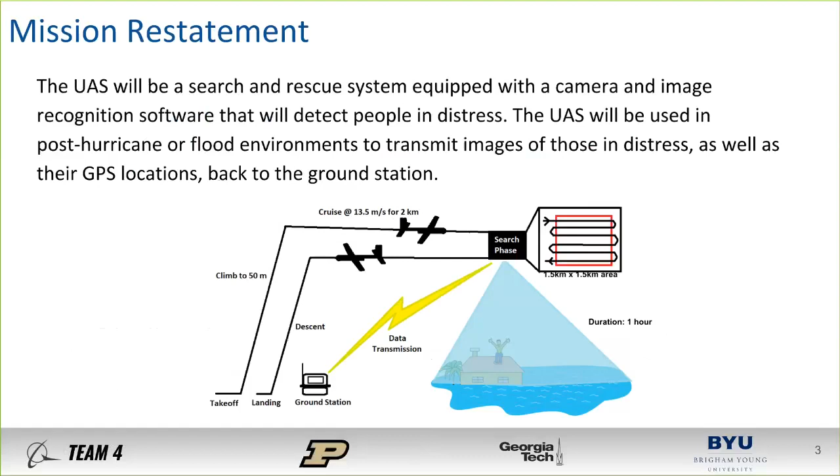So from the MCR, there were a few concerns that we were able to resolve. With stakeholders, we were asked to reach out to individuals who were affected by recent hurricanes, and we're in the process of doing that. We've made phone calls and sent out emails, and are just waiting back for that. We were also asked to make some more definable mission objectives, and so we were able to define a flight endurance of 60 minutes and a range of 50 kilometers.

As for mission altitude, we think that 50 meters is optimal in studying different camera capabilities and being able to resolve people who are in distress. For camera and image processing, Nick Wallace is going to discuss that further into the presentation. And for weight, we were able to reduce the overall weight from 15 pounds down to 12 pounds, so we're pretty pleased with that.

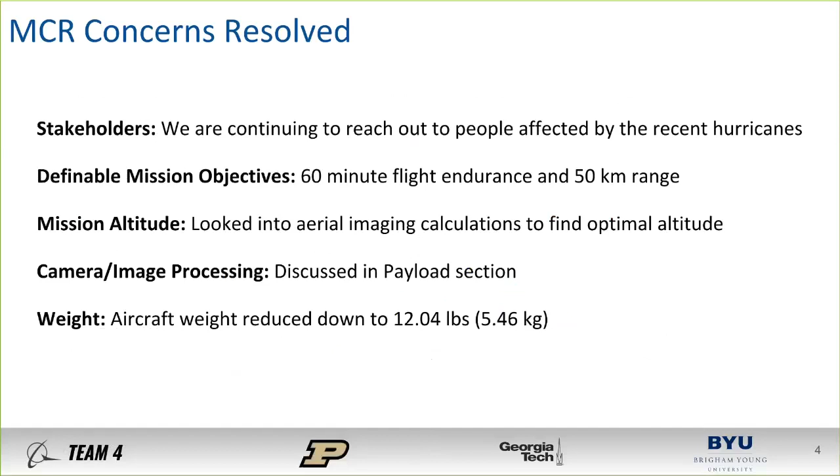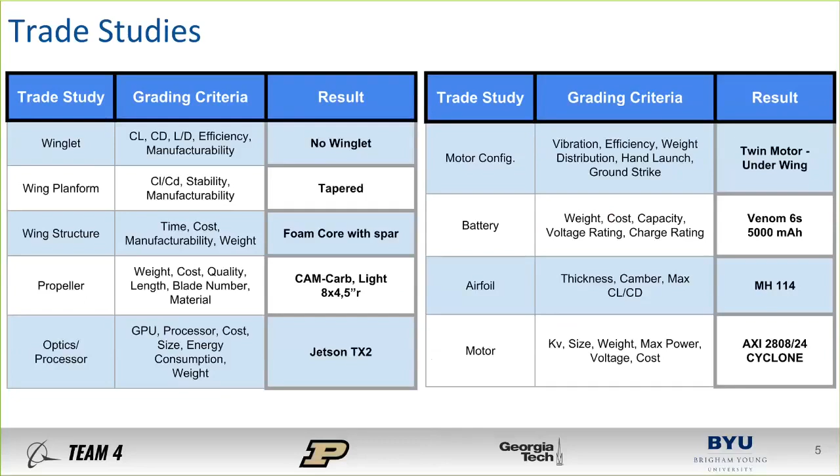Our team was able to come up with several trade studies, and these trade studies were graded based on different criteria. You can see the grading criteria for each trade study listed there. These are our figures of merit, with which we were able to determine a result that we think will be useful in these designs. And several of these trade studies will be expanded upon in the presentation. So I'd now like to turn the time over to Nick Wallace.

Awesome, thanks Josh. So for the next part of our presentation, we're going to be talking about payload specifications. The content in these slides was created by our teammate Andrew Arlarcone, who unfortunately is in a class right now. So I'm going to be presenting instead.

So as previously stated, a big part of our mission is to have our aircraft autonomously recognize people that are stranded. And so we started looking into how to detect people in real time. And we found that the ideal solution is using pre-trained models, which are trained with large pre-labeled data sets to identify multiple objects such as people, cars, or animals.

So these models require libraries for computer vision and machine learning to access videos and to function and operate properly. And all of the pre-trained models that we were looking at can run off of the CPU, but we also found out that they can run with a CPU and a GPU, or graphics processing unit, running in conjunction. This greatly decreased the processing time per frame by almost an order of magnitude.

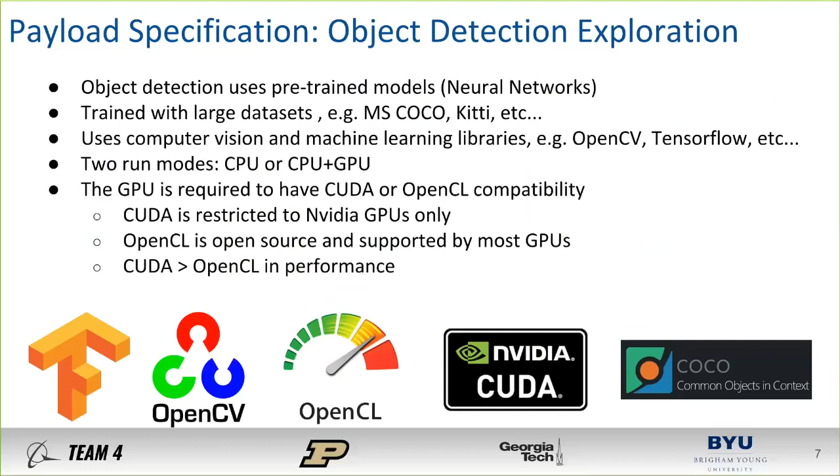And as we were researching, we found that CUDA is far superior in performance and functionality over OpenCL, and it also seems to be the most popular among programmers. And so we decided to look further into CUDA, and really the only downside to using CUDA seemed to be that it only operates and is compatible with NVIDIA GPUs. And so that narrows our selection options for GPUs, which I'll talk about in a future slide.

The RCNN also has two divisions. There's Inception V2 and NAS. So the Inception V2 was a little bit faster. The two divide up the image in different ways, which differs the computational time involved with both of them. And so it seemed like both of them were fairly successful in identifying objects, and the Inception V2 was faster.

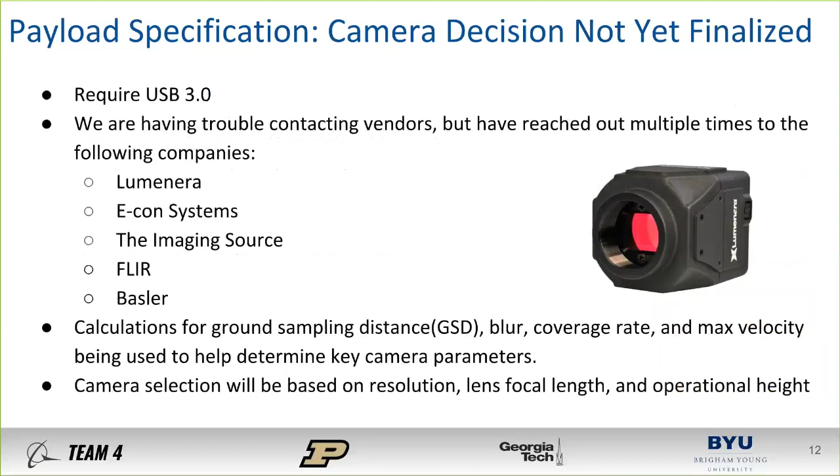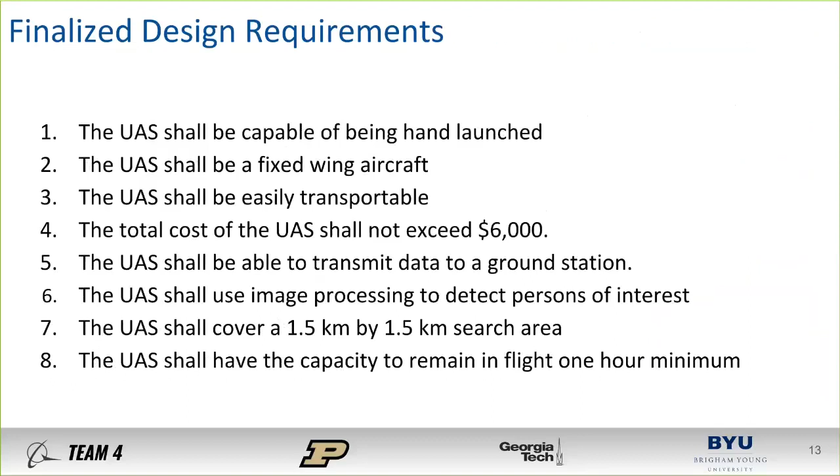This is our finalized design requirements. It's, for the most part, just a continuation of the slide that we presented in the MCR. The only 2 that we added was number 7 and 8 because we felt like we needed more definable objectives. So number 7, our UAS will cover a 1.5 kilometer by 1.5 kilometer search area. And then we want it to be able to remain in flight for a minimum of 1 hour, as Josh specified earlier. And so with that, I'm going to turn over the time to Pratik to talk about our aircraft configuration and aerodynamics.

Hey, thanks, Nick. This is Pratik from Purdue University, and I'll be going over some of our configuration selections for our aircraft. One of the defining changes that we've made from MCR to PDR was in the change of the wing measurements. Originally, we had a very large wing, which we deemed was unnecessary for the speed we wanted to fly at, which is about 15 meters per second. So we downsized the wing a little bit, which helped reduce our weight and also allowed us to carry a heavier payload, which we now know is a CPU plus GPU combo. So that worked well for us.

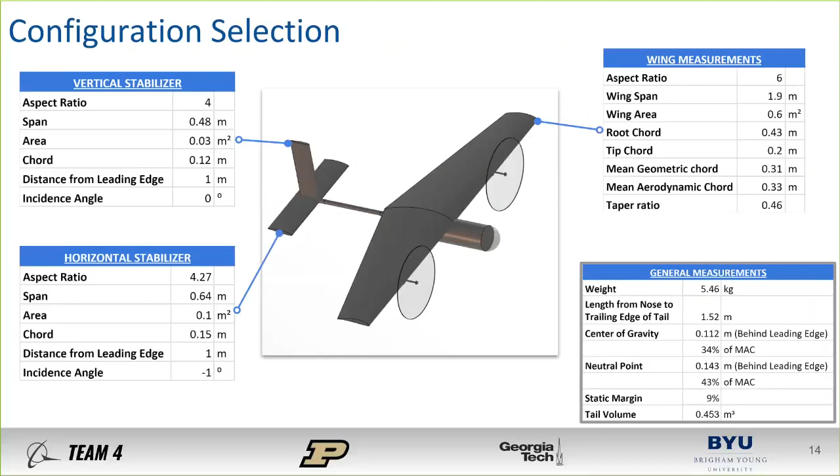So this is where we started with our constraint sizing. Two of our major constraints were that it had to be hand launchable at about 8 meters per second, and the second being we wanted an efficient cruise at about 15 meters per second. The solution we came up with was we wanted a high CL max wing for our hand launch so that our stall speed is much lower than it was initially.

And we also wanted to design our aircraft to fly around a wing loading of about 65 newtons per meter squared. This is behind our maximum that we can hand launch at, which is about 70, so we have a little bit of a buffer either way. For our payload weight, we estimated it to be about 2 kilograms. Our payload isn't currently at 2 kilograms, it's actually less, it's about 1.4. There is some extra leeway to add more components down the line should we need it.

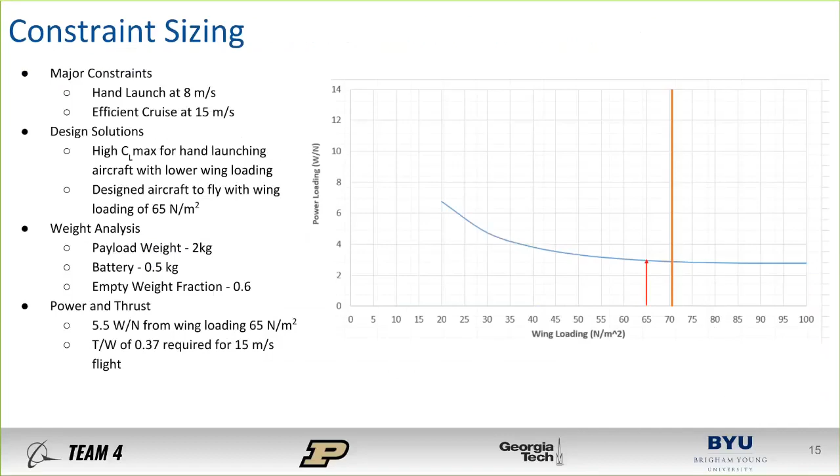And lastly, our empty weight fraction is about 0.6, which allows us to build the airframe to be as sturdy as needed. The power loading that we got from this graph was about 5.5 from the wing loading of 65 newtons per meter squared, which gives us a thrust to weight of about 0.37 for 15 meters per second flight.

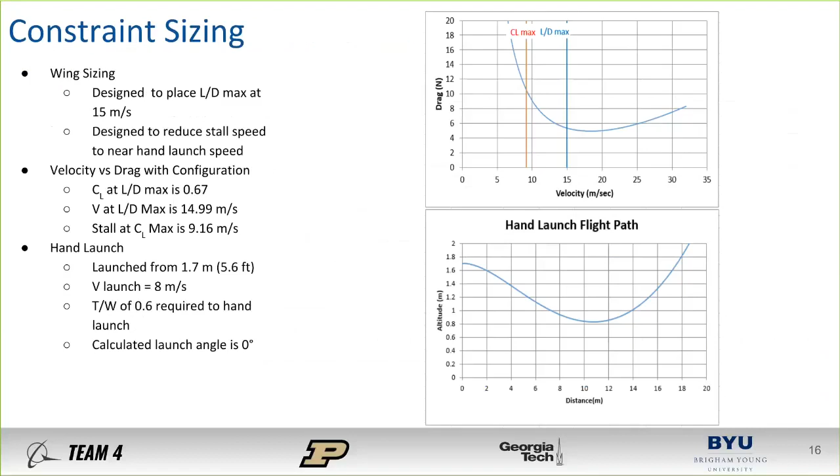Here we have our airfoil selection. When selecting our airfoil, we did a trade study of about 6 different airfoils. Each were compared at around a Reynolds number of 200,000. And we placed a lot of emphasis on our small angle of attack values, so anywhere from -5 to 5 degrees angle of attack. One of the main preferences of our airfoil was we wanted it to have a larger camber so that it would have higher lift at low speeds, again for that hand launch requirement.

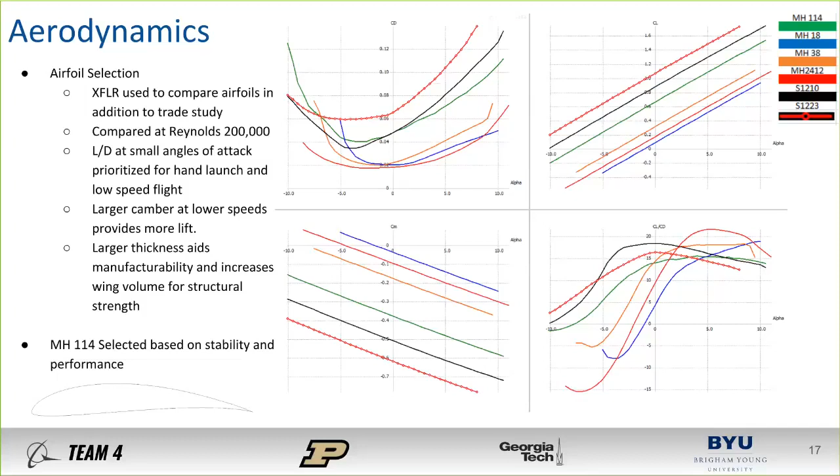For our wing design, we had a couple of different wing design options, and we did a planform trade study. We examined 5 different options. We had the rectangular wing, tapered wing, elliptical wing, pointed tip, and sweep back. Of these 5, the first thing we wanted to look at was how easy or how reliable manufacturing is, so that if we needed to make a replacement, we would be able to do so on constrained time.

The elliptical and pointed tip wings were eliminated because they were deemed too hard to manufacture or took too many resources to manufacture reliably. So the top three wings were the rectangular wing, the tapered wing, and the sweepback wing. These wings were modeled in XFLR5 and compared at a Reynolds of 200,000, just like the airfoils. The dimensions were kept constant between all the wings, and the velocity was modeled at 15 meters per second.

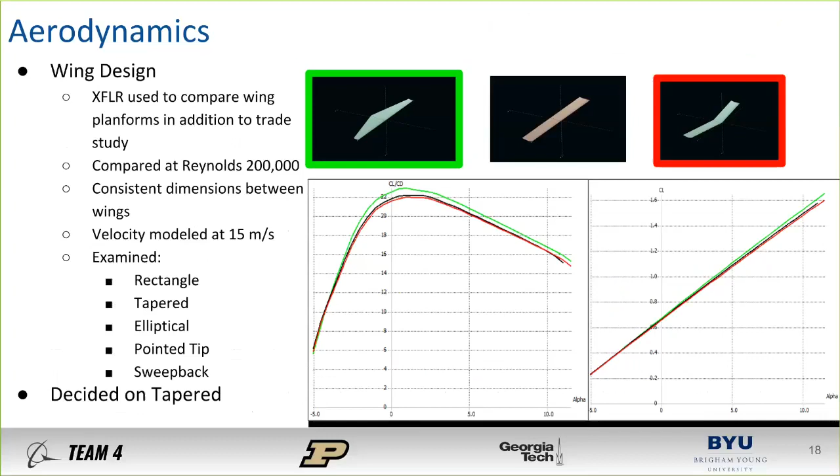For our tail design, we again used XFLR to model and kind of test out the tail design. We started with historical data and proportions to start with the basic tail, and then we used XFLR to calculate our CM versus alpha graph, which is, we wanted to get a positive angle of attack, positive trim angle for our airplane. So by shifting around the size and distance from the wing, we were able to get a trim angle of about 1.2 degrees angle of attack. And of course, the negative slope denotes that it's relatively stable.

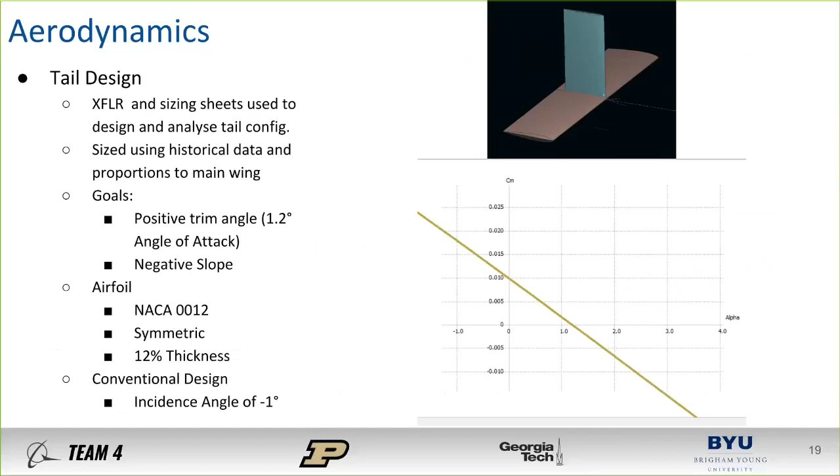For the airfoil itself, we wanted a symmetrical airfoil that won't produce any sort of lift moment. So we got the NACA 0012. With 12% thickness, it's fairly easy to manufacture and easy to implement. We do have an incidence angle of -1 degree on the tail, which helps us balance out our graph a little bit better. Next slide, please.

Lastly, here's our stability analysis of the aircraft. From XFLR, we were able to get the data that our mean aerodynamic chord was about 0.33 meters, and that our neutral point was 0.143 meters, with our tail configurations from the last slide. For the static margin, we wanted to stay between 7% and 10% because flight conditions for our aircraft are very stable, very normal flight conditions. So we wanted an aircraft that wasn't too twitchy or too muddled, so we decided to go the middle ground.

So getting a static margin of 9% required a CG at about 0.112 meters from the leading edge, which is 34% of the mean aerodynamic chord. We're happy with our static margin. However, we want to do AVL analysis in the future to gain a little bit more information about the stability of our aircraft, in addition to what kind of forces we can expect from roll and pitch. Next slide, please.

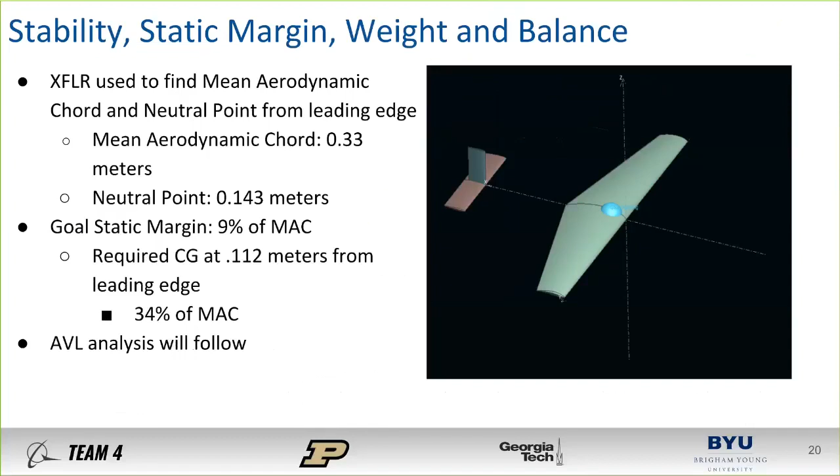This two-level configuration allows us to bring our CG forward and also provides a good space for our propellers because we are doing a belly landing, and propeller strike is definitely an issue that we wanted to focus on avoiding. Next slide, please.

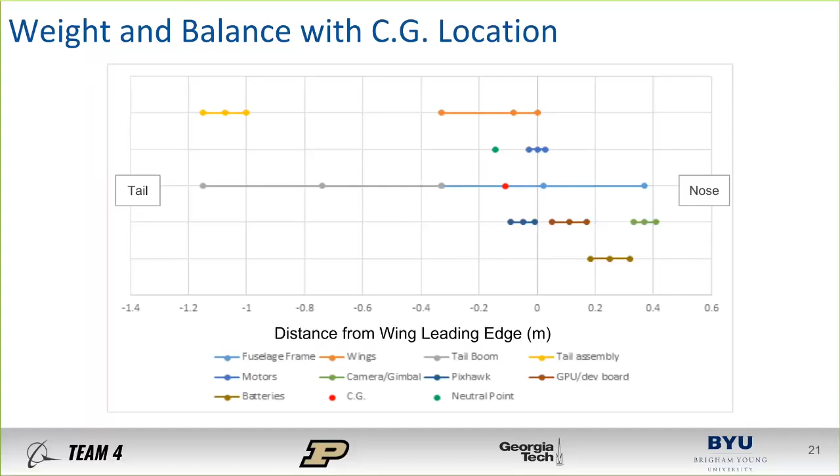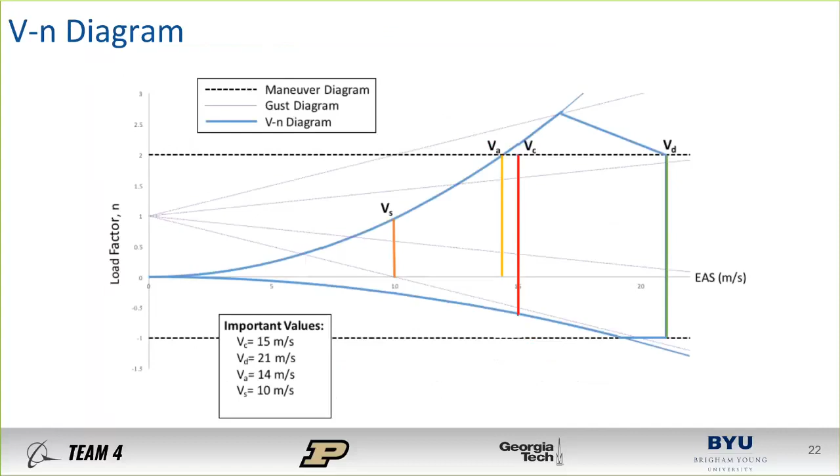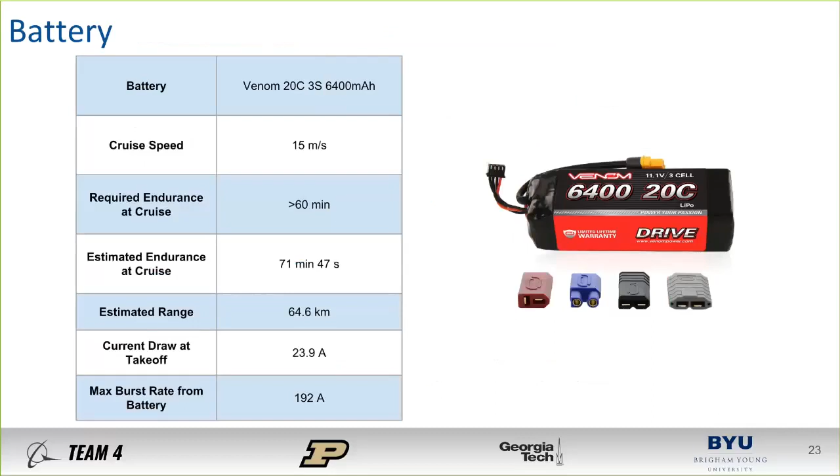So for the propeller, we're using two propellers with our two motor configuration, one clockwise and one counterclockwise, so that way we can balance the torque on the aircraft. The RPM at 15 meters per second is 12,000, and we have a fairly decent propeller efficiency at cruise of 50.3%.

Next slide, please. So as a team, we were able to determine several of the risks that we feel will come up with this project. And as a team, we were able to sit together and determine mitigation strategies for these risks. You can see that they're ranked in consequence level and likelihood. But we feel confident in the mitigation strategies that we've come up with as a team. We feel we'll be able to avoid any of these problems.

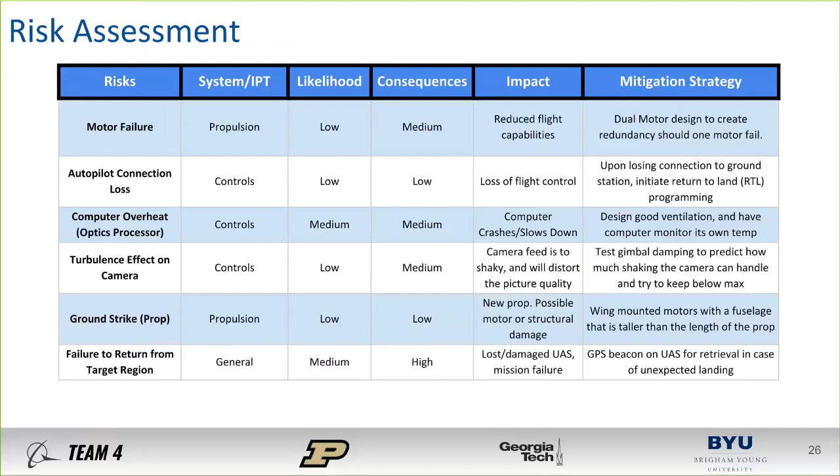As for our budget, what you'll notice is that in the MCR we reported a budget of approximately $5,300, and that has now increased to $5,500. The reason for this increase is mainly because of our processor study results. There were some extra costs that we found there. But that being said, we were able to reduce the cost of our avionics and our propulsion by 19% and 49% respectively. So with that, we still feel confident that we can maintain this budget, but we'll be aware of it moving forward.

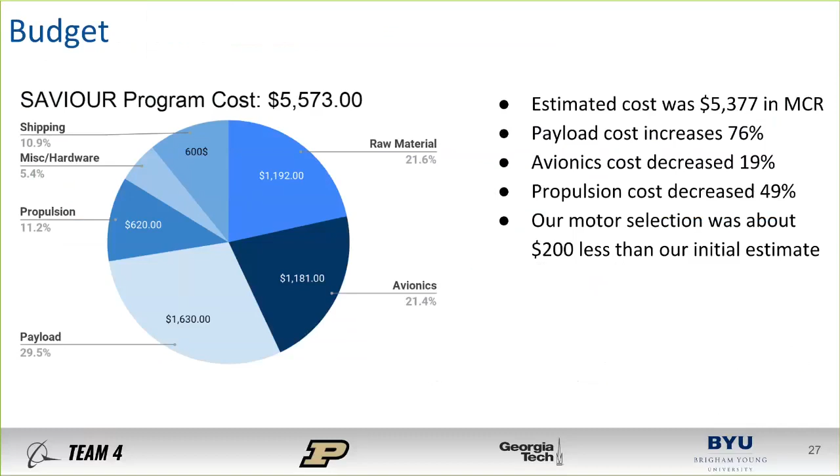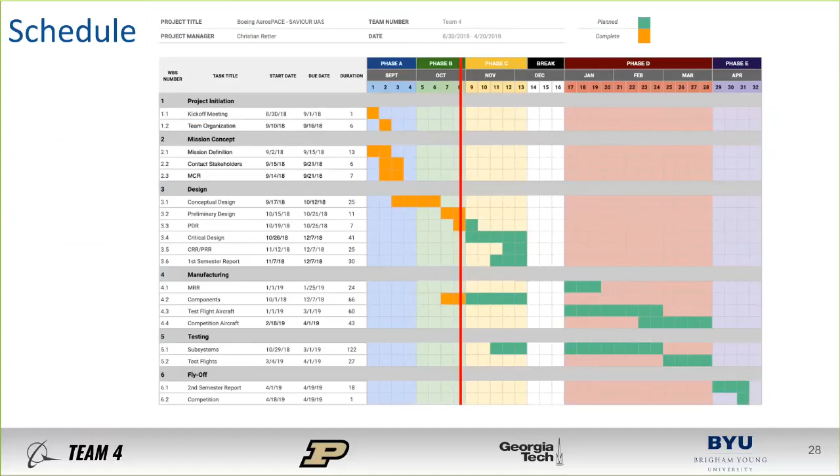As for schedule, we are pleased to say that we've been on track with this timeline that we set for ourselves in the MCR, and we've looked over it again, and we feel confident that we can continue to maintain the schedule throughout the project.

In conclusion, moving forward, we want to do some additional research in our camera choice so that we can find one that's optimal for recognizing distressed people in these disaster environments. Further, we want to be cognizant of our budget moving forward so that we can take into account any payload cost increases. And we also want to do some AVL analysis such that we can get a better aerodynamics analysis there. At this point, I'd like to open it up to any questions that you guys might have for us.

Hey everyone, this is Stephanie at Boeing. Had a quick question about your cost breakdown. I was wondering, have you guys looked at how much of that you can put towards testing versus your final product? And do you have a breakdown, I guess, of what you have for that?

Oh, I don't think we hear you. Yeah, sorry about that. That's a great question. We have a further breakdown in the MCR, but we honestly have not looked too much into the cost of testing versus the total aircraft construction. So that's something that we should look into more. Okay, thanks. Thank you.

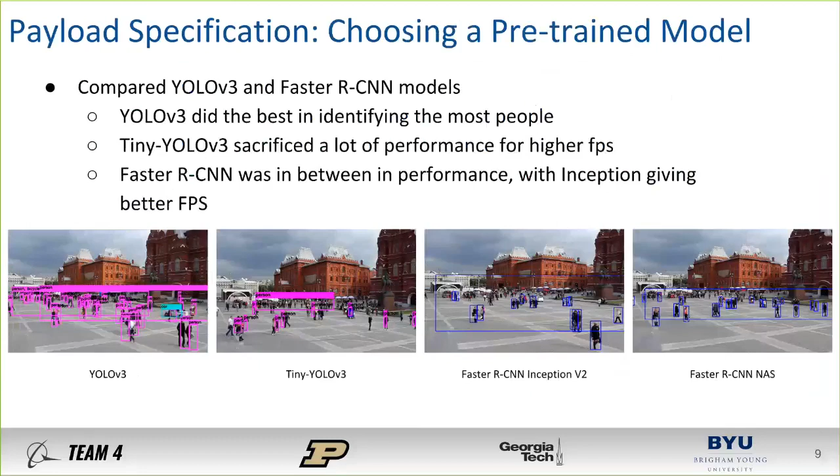So this is a YouTube video that our teammate Andrew downloaded off of YouTube, and then he actually used these pre-trained models to analyze that video, and then took a still shot of those videos while they're being analyzed. Okay. But in the next slide, these were videos that were actually taken by us from a fourth floor in the Georgia Tech building. Okay. This is nice.

It was a little bit unclear because this is not my area of expertise. You talked about GPU processing. And maybe I missed it. Is this for real-time detection, or is this for stored detection, then related to GPS? How does this work? Yeah, so to be quite honest, it's not my area of expertise either, but I'll relay the information as I understand it.

So GPU is a graphics processing unit, so it's specifically catered for analyzing images and video. And so by running the CPU and the GPU in conjunction with each other, you can decrease the amount of processing time per frame. And so this will be real video that we're taking on our aircraft. It'll be analyzing it, and then when it identifies a person, we'll be able to send a still shot back to ground station with the GPS coordinate.

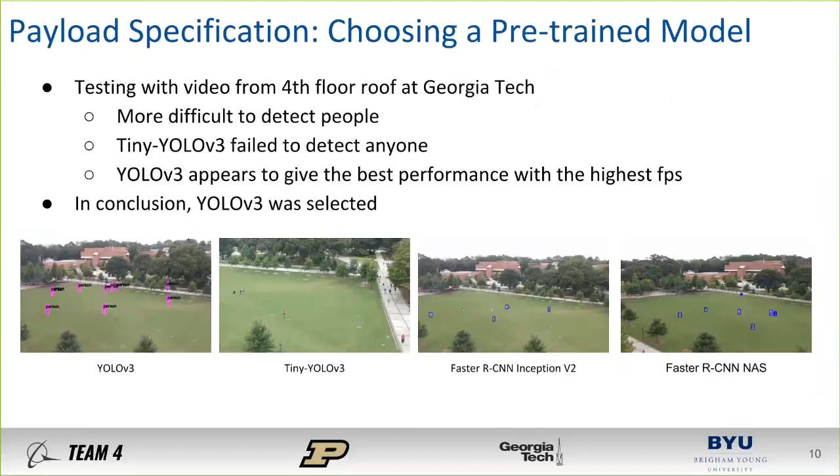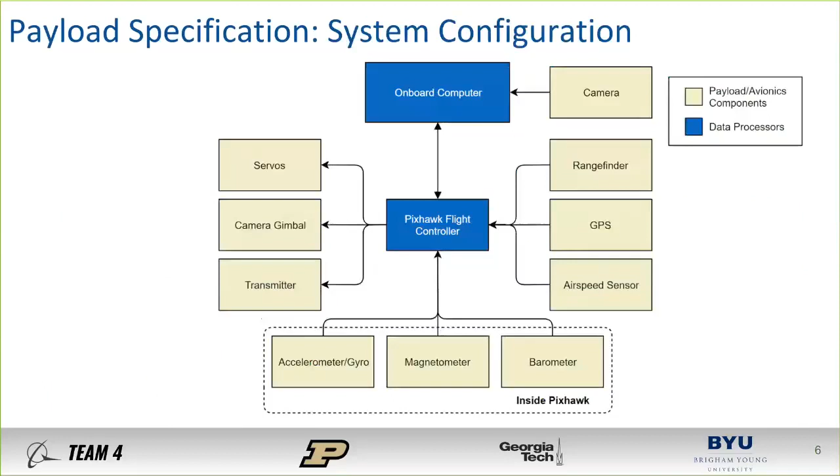Oh, okay. This is an assault on my senses here. Fine. Just a lot of information. Okay.

Have you done any power calculation in terms of size? You sized the battery out for your propulsion system. Have you considered the battery that you'll need to run this GPU? So currently, we're still finalizing our GPU and CPU configurations. Once we have those figured out, we are definitely going to have an external power source. So we're going to look into that at a later date. But as of right now, no, we've only done the battery sizing for the aircraft itself.

Okay, so again, I'm not trying to dig into too many details. I would assume that you would need to run this GPU for the same duration as your flight? Yes, that's correct. Okay. And maybe the power consumed varies depending on if it's doing any processing, but I guess one would argue that you would always have to be doing processing of images? Right. The CPU and GPU will most likely continually be checking the video footage, see if there are any matches to the pre-trained software for if there was a person or not.

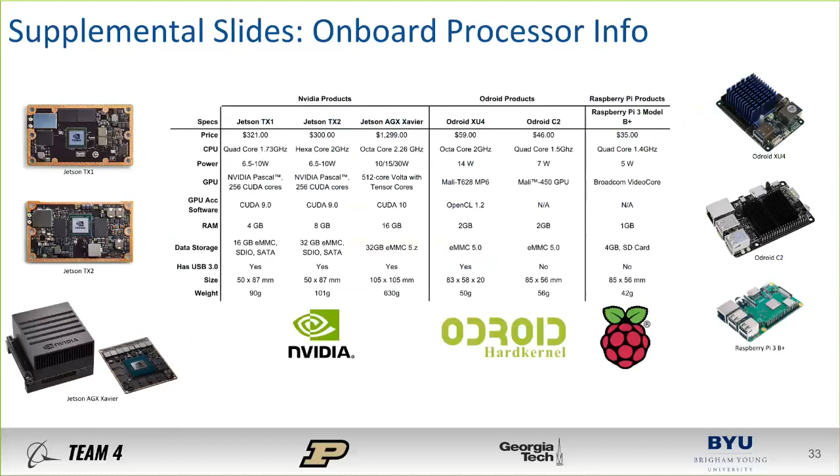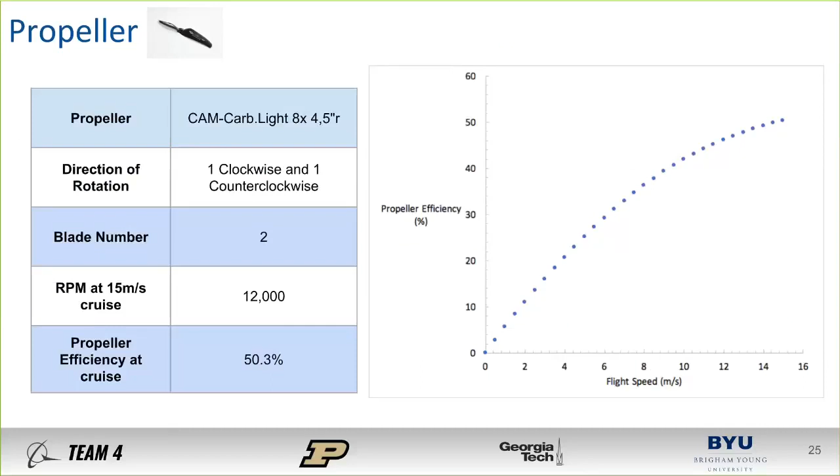Okay. So if I go back to Phil's and Carl's presentation on propulsion, you might think about how you're presenting the efficiency of the propeller times the efficiency of the motor ends up being the total efficiency of the propulsion system, right? Yeah, we'll change that notation for the future. Thank you. Okay. Are there more questions? I will yield the floor. More questions for Team 4.